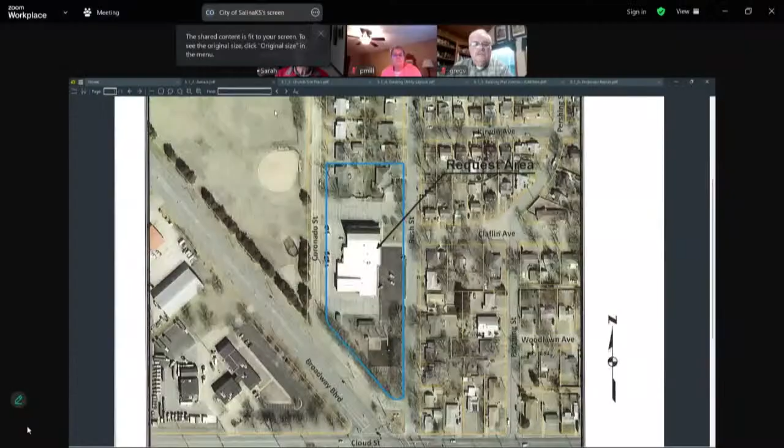Okay, so we'll try to cover this pretty quickly. We have indicated in our report that Kansas Wesleyan University recently acquired ownership of the Church of the Cross property, and that property includes the church building as well as 2 single-family dwellings located at the north end of the church campus. There is an agreement between Kansas Wesleyan and the congregation whereby the church can retain ownership of the 2 parsonage houses if separate lots are created for each home through replatting within 12 months. So the purpose of this agenda item is the plan to create 3 separate platted lots: 1 for the church facility and 1 for each of the individual dwellings.

One of the things we're trying to do, and working with the church's surveyor on, is to make sure that we have all utility lines in the rear identified, that we get easements where public utilities are needed, and that we identify those lines that are private.

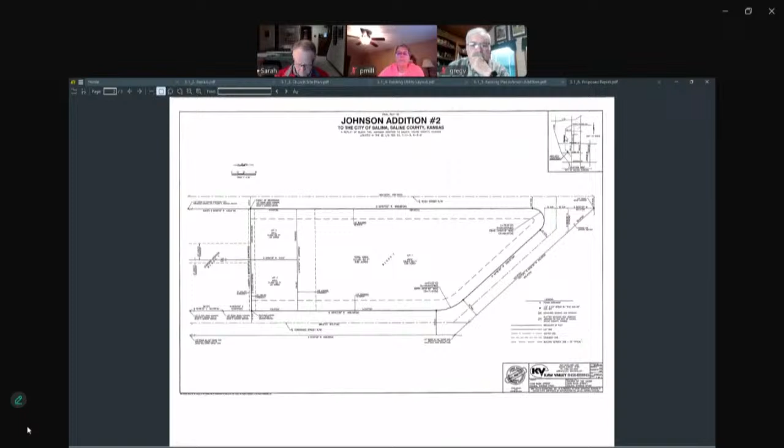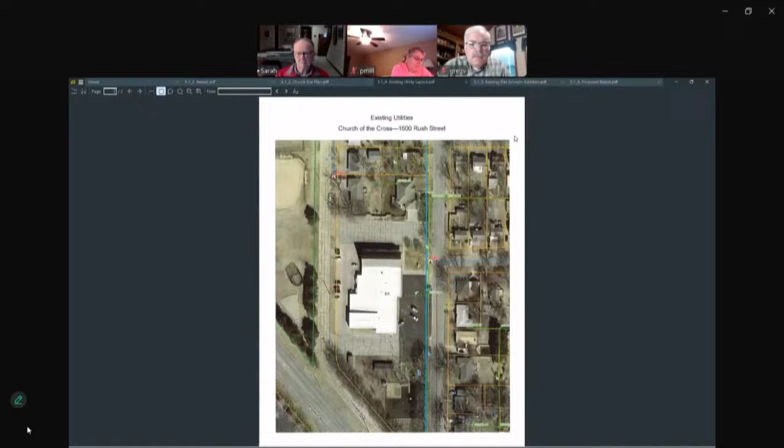In preparing for today's meeting, we noticed 2 things. One, a fundamental issue we'll work with Kaw Valley on, is that they used the incorrect final plat for the Johnson Addition as their base document. So all the easements shown on the proposed replat in the packet are incorrect as to location and width, and we need to resolve that.

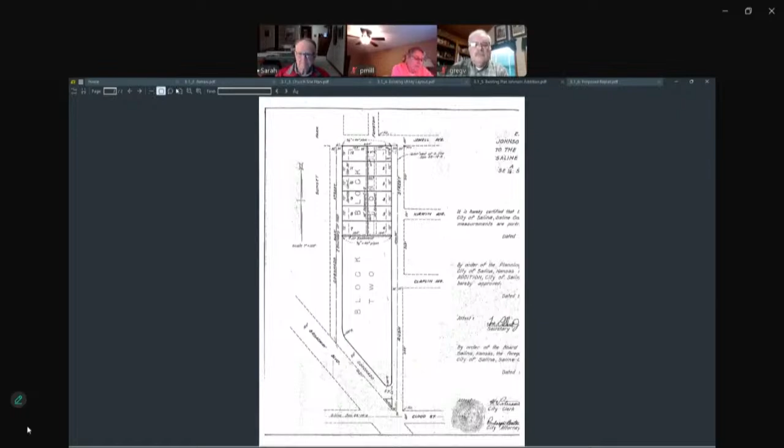The second thing we need to determine is whether the public sewer that serves the middle of that block extends into the rear portion of either of the 2 residential lots, and just how far that goes. We want to do this right and correctly identify the things that need to be protected if these are split into separate lots. We think with an additional 2 weeks we can work with the church and the surveyors to correctly identify those things, but we can't say the easements as depicted on the plat today are accurate. So we think we need 2 weeks to get that cleared up.

The other thing, something we found after the packet went out, was that the original sewer was put in for a different project—it was installed for the war housing project intended to serve Army barracks that predated any of the houses built there or the church. So the sewer is in an odd location in the block because it was installed to serve Army barracks that may or may not have been built, but it wasn't installed to serve the homes that are there today.

That's added a different level of clarification needed to make sure we know what's public and what's private. So our recommendation is that you postpone this item until the March 4th meeting, to allow staff to work with the applicant's surveyor to confirm utility line locations and finalize easement locations before the commission acts on this request. It's a relatively simple replat, but this is our one and only chance to get the easements in the correct location, and we want that done before we have you act on it.

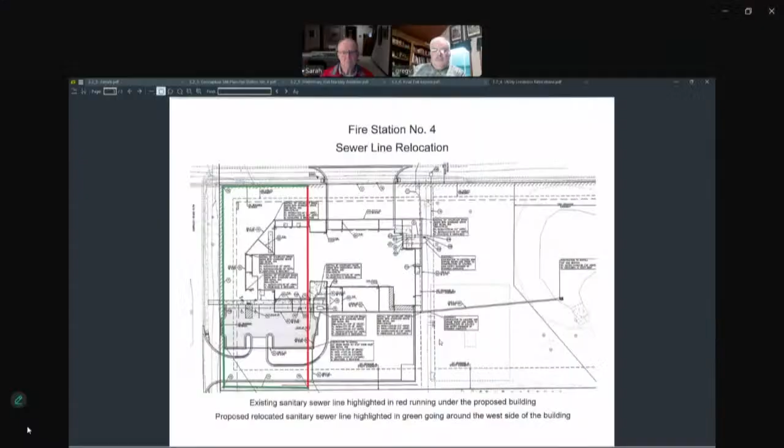So as a general rule, we try to avoid having buildings placed over active utility lines, but the Director of Utilities has reviewed this plan and determined that the sewer line is sufficiently deep that it won't be disrupted or damaged by the placement of footings or floor over it. And so, as you could imagine, a fire station with some fairly large, heavy vehicles needs a more substantial footing and foundation than some that wouldn't be carrying so much weight. So by leaving the line and then filling it in place, that has the additional advantage of not having any disturbed soils underneath the building.

So essentially what has occurred is that they would like to get started on the fire station sooner rather than later, and the planning staff is holding up the permit because the condition said you move the line first and then you can have your permit. So the change would be that work would need to be done before a final certificate of occupancy was issued for the fire station. So if this language is approved, it would expedite our ability to issue a building permit and allow construction to proceed without requiring the sewer line to be relocated first. That's the essence of it.

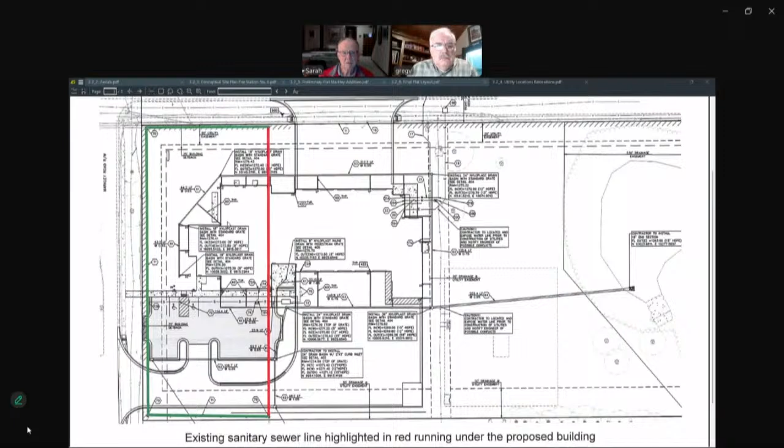I was a little confused by the graphic. I didn't know if it was going to be a loop or if it was just capped. If you could maybe blow that up a little bit, but the red line is the current sanitary sewer that runs through the property, and you can see the outline of the building. The sewer is going to be right underneath the fire station.

So the original plan was the area outlined in green is the new rerouted sewer. And the original plan is we're going to reroute the sewer, hook up the sewer to the rerouted line, and then we'll tear out the sewer and construct the building.

So what's going to happen instead is that the red line, which is the current sewer, that will remain in place and operational. Then when the new sewer is ready to be operational, instead of excavating and digging the sewer out, they'll just put flowable fill inside the pipe so there's no void there, and cap it off, and then it will just remain in place but not in active service.

And that has the advantage of, if you excavate and take the pipe out, then you're disturbing the soils. So this avoids that and allows the project to get started sooner as opposed to waiting for the sewer to be relocated first.

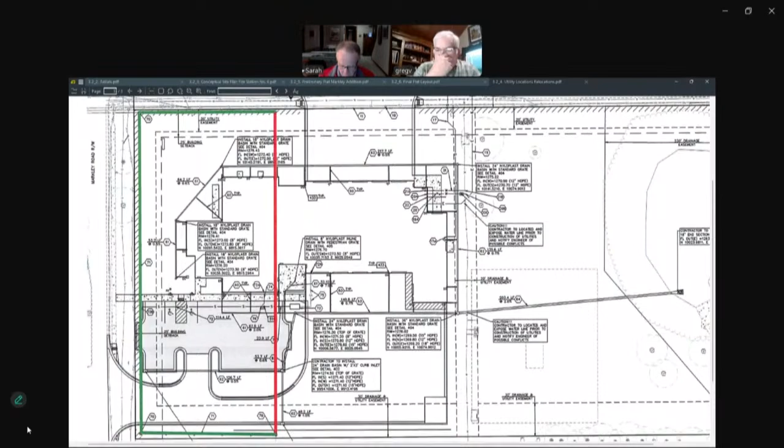So are they filling the entire line, or are they just putting the fill on each end cap? As far as I understand, they're going to put flowable fill through the entire pipe. That's what the Director of Utilities expressed to me.

All right, any other questions of staff? All right, anyone online, Dustin? I don't see anybody online, members of the public, to speak.

All right, commissioners, I open it up for discussion or a motion. I think it seems like pretty much a no-brainer. I mean, it seems like a pretty simple issue, and I would make a motion that we approve that language change in that plat.

Okay, it has been moved to accept the language that is written on page 3 of the staff report for this application. Is there a second? Second. I second. Okay, thank you. There's been moved and second to reword this certificate of completion, on page 3 of 3. All those in favor say aye. Aye. Aye. Aye. Okay, thank you. Motion carries.

So that will, we just did not feel comfortable. It was an action taken by the Planning Commission. We didn't feel like staff should just change it on our own, so we brought it to you so you could be informed of the issue and make an informed decision.